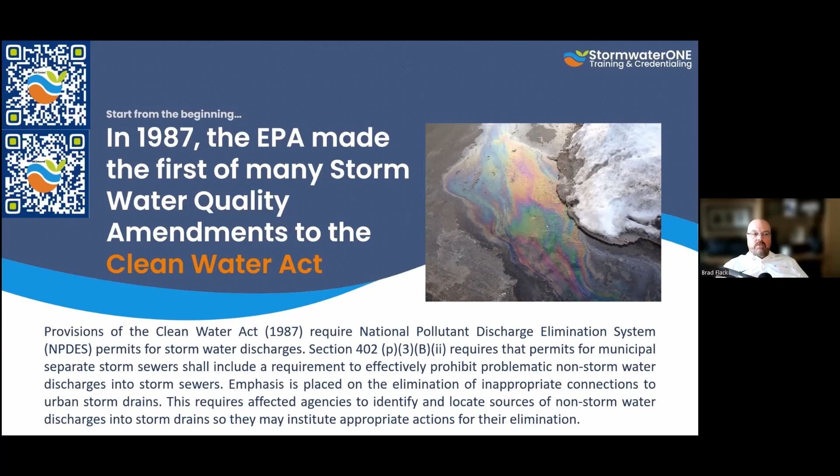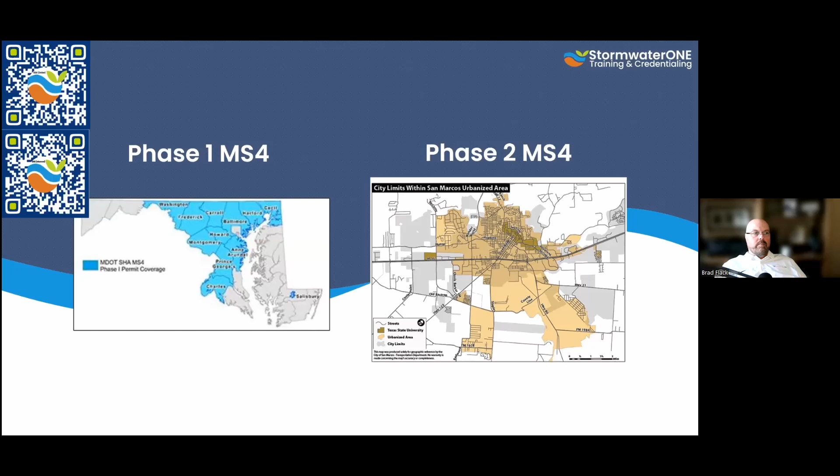The phase ones have been around longer, and kind of have an idea of what they're supposed to be doing. So the phase twos, we're still playing catch up here, even after 10 to 12 years later. We're still playing catch up on trying to get all these phase two MS4s up to speed on what they're supposed to be doing.

As a reminder, this is very elementary, but I want us to make sure we're all on the same page here, there are three different kinds of pipe systems underneath the ground, right? The first one is fresh water. That could be from a municipal water supply. It could be a drinking water supply, whatever. It could be a well on a site, or a well that distributes drinking water to a number of homes or businesses, right? So we have the drinking water system, and then when you wash your clothes, that dirty water that gets flushed out of there, toilets after they're being used, etc., those are emptying out, and those are going into a sanitary sewer line.

And that sanitary sewer line, if you'll remember with me, you go back to watch the movie Finding Nemo, and that scene in the dentist office. You've seen Finding Nemo, right? This is not a spoiler alert, but you go into the dentist office, and they're all trying to get out of the fish tank, and they're trying to go down the drain or get flushed down the toilet. And the idea that they keep saying is all drains lead to the ocean. Well, if you worked in any sort of municipal operations, yeah, drains do lead to the ocean, but not a direct path. They hit a big hurdle that they don't mention in the movie on the way to the ocean, and that's the wastewater treatment plant, right?

So we have this big obstacle that they're going to hit, where the fish would get ground up and the liquids and solids separated and all this kind of stuff. So there's a sanitary sewer in the ground. And then we have our storm drains that might be in the ground, our storm sewer system. And if you notice, the freshwater supply, that's effectively clean water, right? And then you have the sanitary sewer once it gets to the wastewater treatment plant, or sometimes you have an on-site sewerage facility, or maybe like a large septic system of some sort.

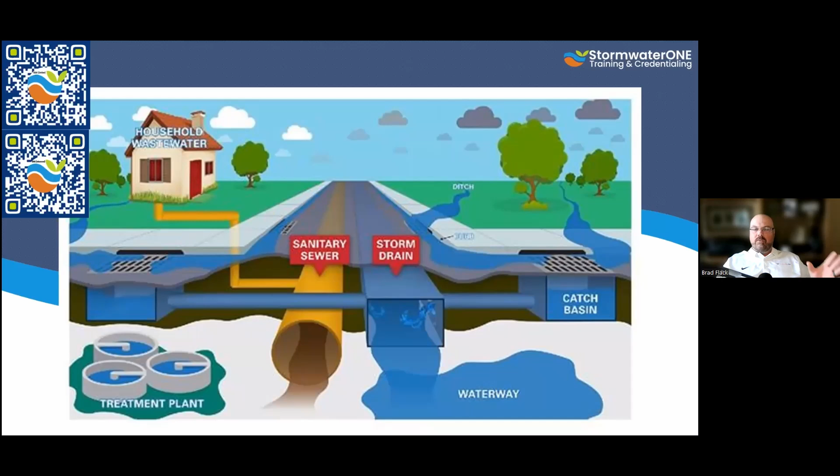But in the meantime, we have a lot of systems that are older, and so we haven't done a retrofit of everything at this point. And so we have a lot of older systems where surface pollutants are still allowed to discharge down. So instead of trying to put a filtration system on every single drain that's been there for 100 years, we're now trying to prevent those pollutants from going onto the ground or discharging from that site in the first place. And that's kind of what this idea of IDDE is about.

So let's define this real quick. What is the basic definition here of illicit discharges? The basic definition is this: they are simply a storm drain discharge that has some sort of measurable flow, like I can see there's something there. And it's typically important for us to remember to do this during dry weather, because when there's wet weather, when it's rain or you have a lot of snow melt, you're going to have water flowing through there, and it's going to be very difficult to detect any problems.

But if it's been a number of days or weeks or even months since the last rainfall event and there's still water coming out of the storm sewer system, we might have a problem. We might need to actually go and investigate what's going on there. These illicit discharges typically contain pollutants or pathogens that we don't want to enter into our surface water. They typically will originate from an impervious surface, so they're coming off of asphalt, concrete, pavers, etc. That's the place where they're coming out the most.

That doesn't mean that they can't also come off of unpaved territory. They could. Somebody spilled a bunch of oil onto the ground, and it rained. Oil floats on top of water, so that would discharge. But most of the time, these pollutants are coming off of impervious surfaces. And so some of the major places that we need to keep really close eyes on would be apartments, dense home development where a lot of people are living, car washes, even restaurants.

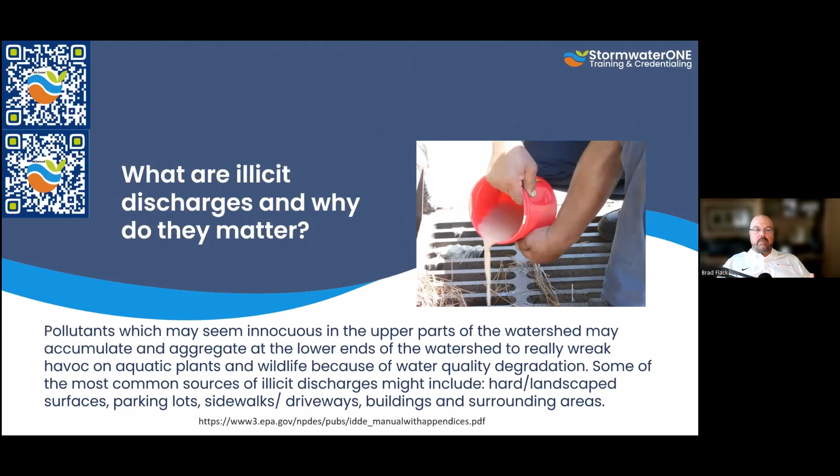So having a basic understanding of what these generating sites are should help us to understand our inspection and monitoring procedures and locations within our jurisdiction. So are all discharges the same? Well, the simple answer is no.

I mean, if I'm in a small town and I don't have really any manufacturing going on there, and I just have farms around the outside of town, and I just have some retail and general store type stuff or whatever, my types of discharges there are going to be vastly different than if I'm in a dense manufacturing industrial operating area. And so with an illicit discharge, we still want to prevent those pollutants from discharging out into the receiving water, but what we're chasing is going to be different based on where you are.

That's actually why we kind of have to fly at a high level. You can imagine everybody here, I mean, from Edgewater, Florida to Columbus, Nebraska, we've got huge swings in what all these different sites are and what their potential pollutant loads might look like coming out of there.

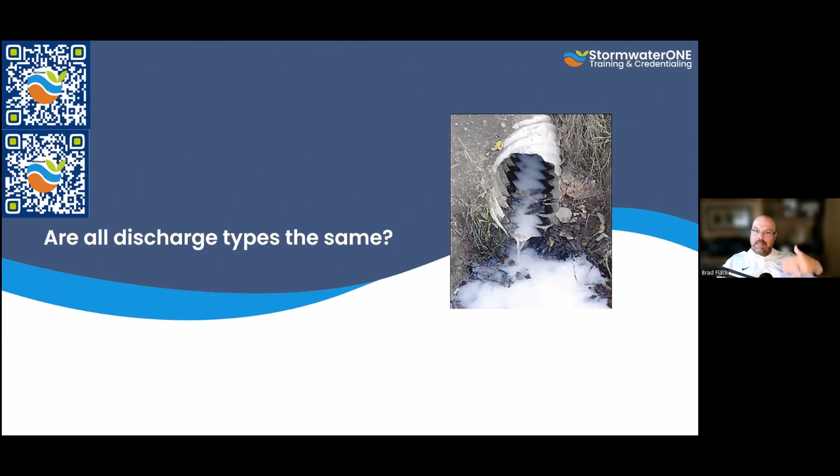Now, that being said, the MS4 permit that you're operating under does allow for a handful of non-stormwater discharges. And so non-stormwater means not from rain or snow melt. And these waters are allowed to discharge, but I'm going to put an asterisk next to that. We're going to talk about that for the next couple of minutes here.

So one of the non-stormwater discharges that would be allowed is firefighting activity, allowing us to prevent a building from burning down. We're going to spray the water on there, and that is an allowable non-stormwater discharge. The only caveat to that would be what is in that building, or what is that building made of? We need to think about that before it catches on fire.

I wouldn't want a dry cleaner chemical distribution center to catch on fire and us just spray water on it and call that good, because if any of those storage containers, any of those totes has some sort of compromise to allow those dry cleaner chemicals out of there, we want to have protocols in place so that we can prevent those from leaving with the firefighting water.

And as Mel mentioned, a lot of these firefighting activities, depending on what you're doing, have some sort of surfactant added, and that's to help coat and snuff out the fires. And so all of those would have to have kind of pre-planning in place to make sure that we understand that there is a potential for other pollutants besides just water from the fire hose coming out of there.

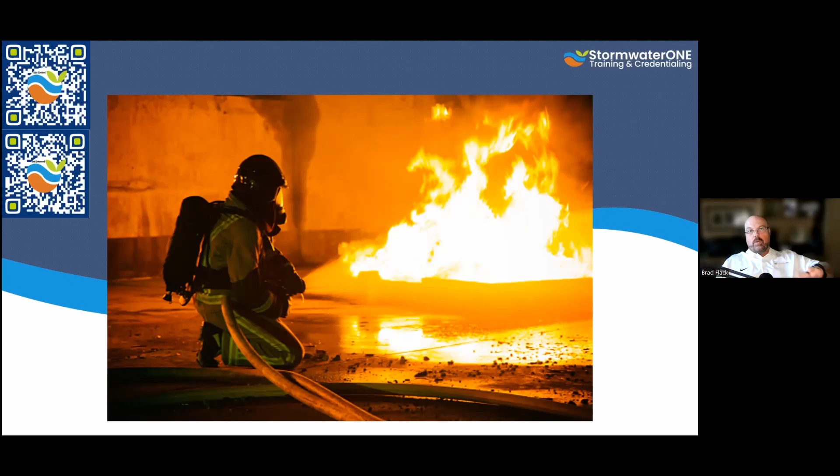So again, it is an allowable non-stormwater discharge, but if we're all here because we want to learn and we want to do better, we have to remember that there are going to be some places where we have to put in additional control measures to offset those potential discharges from the site.

Another non-stormwater discharge would be fire hydrant flushing. That's one of those things where you just drive down the road and splash through the water. So where's this water coming from? It hasn't rained in 2 weeks. And you reckon, oh, there's a fire hydrant. We're flushing a fire hydrant. That's okay. The caveat to this would be if the fire hydrant is spraying water onto a pollutant source, onto a used oil pan or something, and that could be discharging pollutants from the site.

Or if the fire hydrant is flushing onto bare dirt, bare soil, and it's causing erosion, then we're discharging sediments out of there. So we've got to be careful about where these things are placed. Obviously be mindful of all the different environments around those so that we can prevent the discharge of any pollutants, even when we're doing something as mundane as flushing fire hydrants.

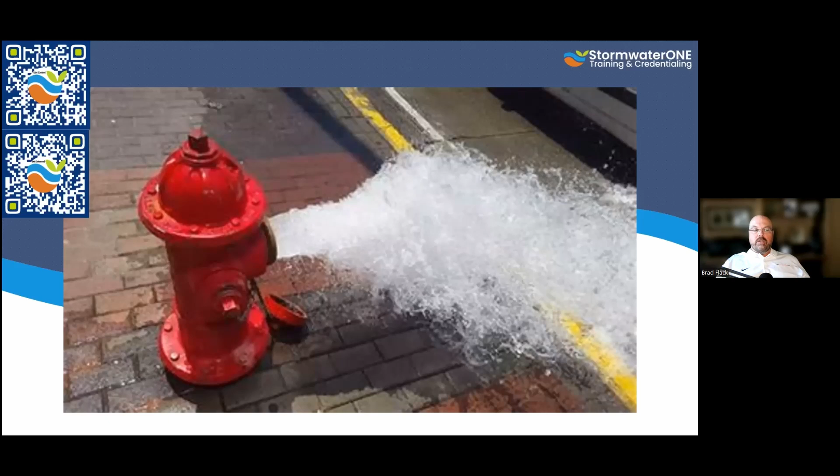One of the other ones is washing of vehicles and equipment. You are allowed to pressure wash. The idea behind this is it's not in complete disrepair. It's not like the hood's missing and you're washing oil off the engine onto the ground. We're washing the outside. And the idea is the outside of the vehicle is going to have dirt that would otherwise end up on the roadway anyway, right? We're just washing it off so that the vehicle's clean and leaving the dirt on site.

And so we actually have an ability to wash off equipment, but we wouldn't want to discharge any sediment-laden water off the site. And the caveat for the whole thing is that we can't have any soaps, solvents, or detergents in our wash water. So as soon as we mix in that soap with that sprayer and we're washing it, now it's a non-allowable discharge.

Mel also made a note here. She said, in California, the temporary crash cushions are filled with potable water, and sometimes they are near bridges. When they empty them, they need to make sure it doesn't flow into the water body. Yeah. So again, those plastic crash barriers that are on roadways and highways, they're filled with potable water, sometimes non-potable water, depending on where you are. But we need to make sure that those are not flowing into the water body.

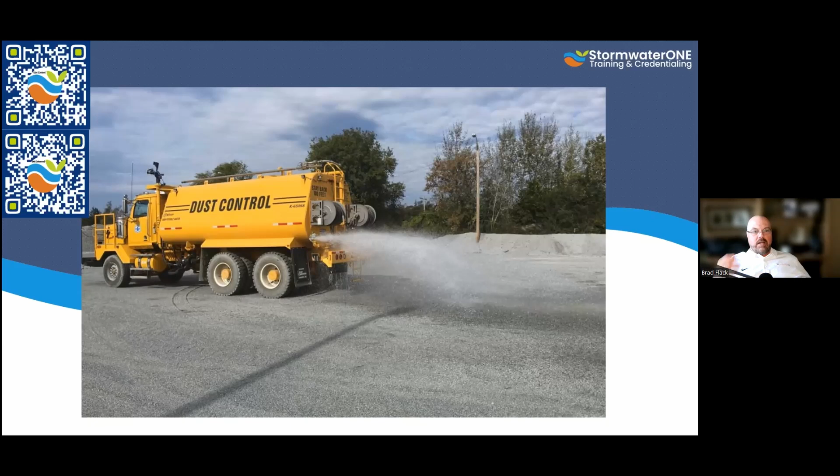Pressure washing of a building, that is an allowable non-stormwater discharge, provided there's no soaps, solvents, or detergents. And again, that rain's already going to hit the stuff that may be on there, some algae or dust collected there. Some of it's going to discharge. And so we're just saying, hey, we're expediting that process, and we're just washing that stuff off the surface. And if we don't have any soap, solvents, detergents, it can go through our system.

But if we have soap, solvents, detergents, some sort of acid wash or something, then we have to collect that, take a vacuum truck or a pump truck and suck that material up and then haul it to the wastewater treatment plant to get processed properly. Furthermore, if we have paints or caulks that have PCBs, those would also be a concern, because if you end up pressure washing and some of that stuff comes off, that would end up in our surface water, and that's not allowed as well.

So understanding the materials that the building is made of and what is on the surface is key to understanding your compliance there. And if you need to put some sort of acid, soap, detergent, whatever, to make the building clean, then you would need to plug up all the drains, let the water collect, and then remove that water before you allow the surface runoff to exit from the site.

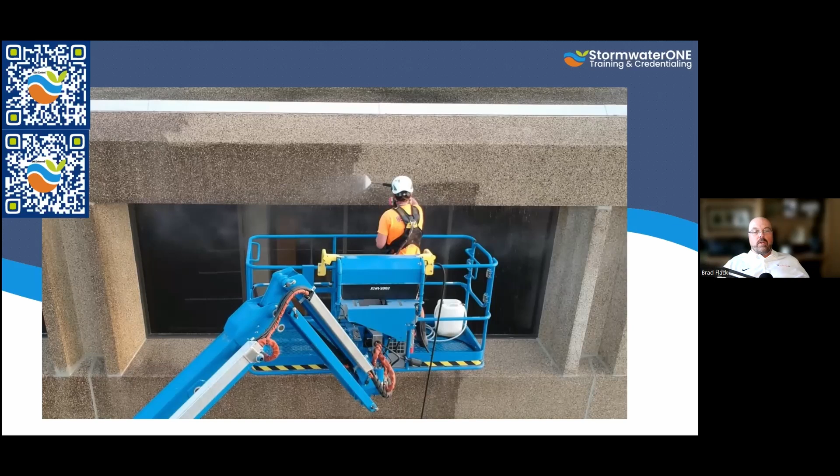Another one in the same vein is going to be pressure washing of pavement areas, parking lots, etc., provided there's no spills or leaks of toxic or hazardous substances on the ground. If you're going to pressure wash the parking lot at the football stadium downtown, you're allowed to do that with no soaps, solvents, detergents or acids. But if you know that somebody's car was leaking oil all over the place, you can't use the pressure washer to wash the oil off the parking lot down the storm drain.

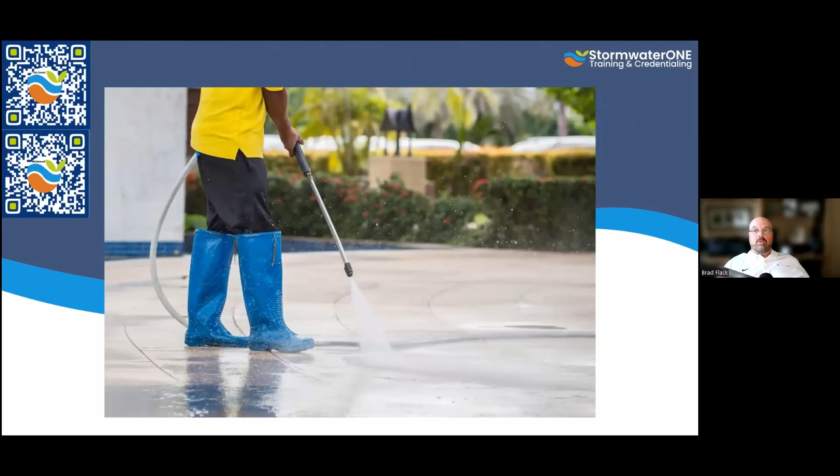That's not allowed. You have to deal with that area first, clean up that spot, and then you can do your pressure washing of your paved area. So we want to make sure that we're not just removing it from our site and sending it downstream for someone else to deal with. And someone else is likely one of you, because I'm assuming most of you are working for some sort of MS4.

And so they're just saying, well, we'll let them handle that, right? Another allowable non-stormwater discharge is going to be condensation from your air compressors, from your air conditioning systems, etc. It just takes atmospheric water and discharges it down into the ground. If you can let that go onto a grassed or dirt landscape area of some sort, that's even better, because then that water can soak in and be utilized by the plants and vegetation. If you can't, you can allow it to flow across the parking lot or across the sidewalk or whatever.

I have a client that does fiberglass conduit and pipes and fiberglass street lamps and stuff like that. And their air compressor is huge, because that's how they hold the molds open, they put compressed air inside of them. And the discharge line for the condensate that they put on the outlet of the air compressor is made of galvanized pipe. And so it's actually causing rust. And now there's big rust stains coming out, and that's dropping right down to the storm sewer.

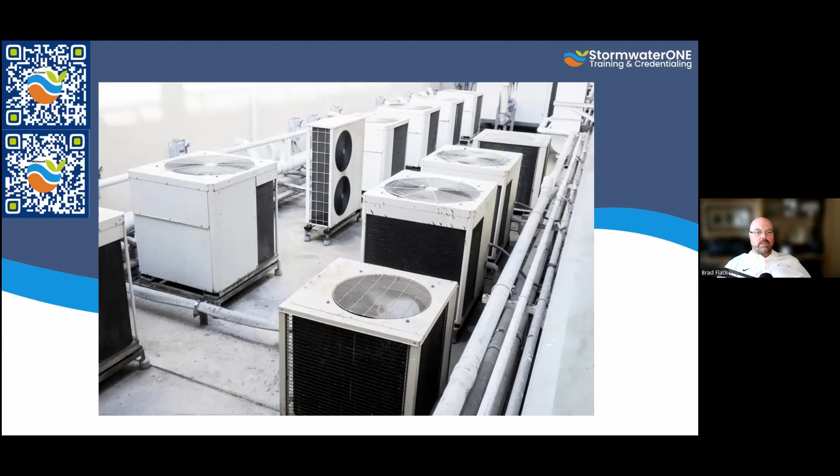So I'm working with them right now to, hey, let's change this out. You're allowed to discharge the water. You can't discharge rusty water out of there. So we're changing that over to like a PVC discharge line. It's not under pressure. It's just the condensate that's discharging. So keep that in mind as you're thinking about your non-stormwater discharges.

If you're on a site that is pretty blessed and has an uncontaminated, non-turbid discharge of groundwater or spring water, that's an allowable. You can leave that spring flowing there. That's okay, as long as it's not causing additional erosion and it's not in contact with any of the pollutants on the site. You're allowed to let that water flow across the site. So keep that in mind.

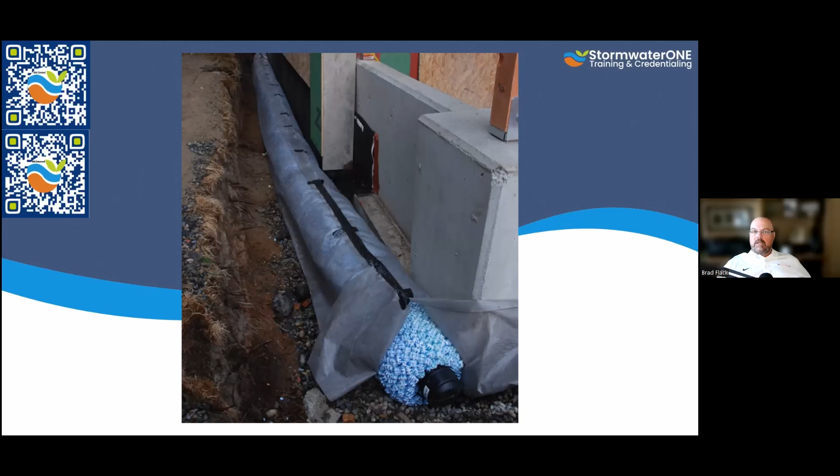If you have a foundation footing or a footing drain, you're allowed to let that water that seeps through the ground and enters into those drains then discharge out onto a lower area of the site or out into a storm sewer. That's okay as long as there's no known pollutants entering into that system. So this is another one where, I don't have X-ray vision, so I can't look into these things. And as long as there's dirt and grass and landscaped area around here, then conceivably the water that's flowing through the ground and entering into this footing drain is okay. And so that's the idea behind that.

The next one is going to be water that's used to irrigate grass or landscaped areas. Those are allowed provided they don't cause erosion or otherwise spray water over top of a pollutant area. So we want to make sure that we're mindful of the various zones around our site to prevent that excess non-rainwater from coming in contact with those areas where it would cause a problem.

Anita says California Phase 1 permits require larger water purveyors to have coverage in the state's potable drinking water permit, which has required BMPs for fire hydrant flushing and other potable water discharge. Also, California just released a draft Phase 2 permit, and I'm not sure if this requirement made it into that permit too. Okay, so you've got to make sure that you have coverage there for BMPs for fire hydrant flushing.

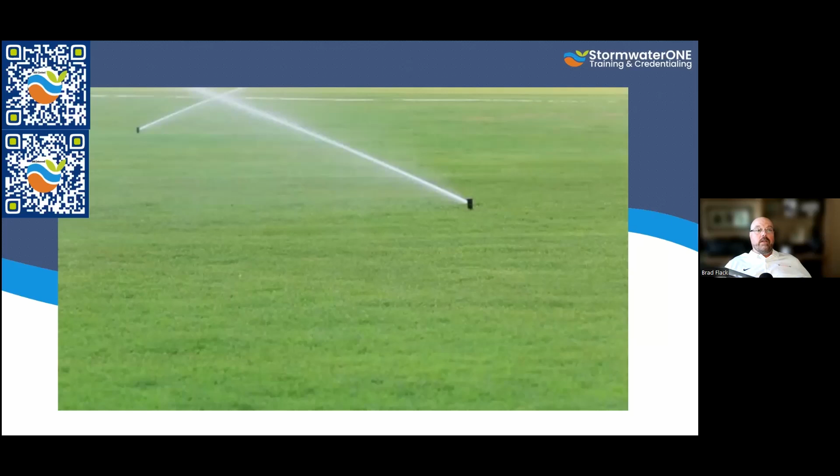I wouldn't drink water out of a fire hydrant, but it is coming from the same sources, as I understand it, that our potable drinking water supply is coming from. And so part of the flushing there is to make sure that we're not allowing that water to become non-potable by it sitting there and causing undue accumulation of sediments and other stuff inside those things.

The other one that is allowed to flow across the site if it's not from stormwater, like not directly from rainwater, is if the water is flowing through an established riparian zone. Riparian is the root from a Latin word that just means the shore. So if you've got water that's flowing off of a site and it goes through a riparian zone, these brushy, tree-lined areas along the sides of a stream, lake, river, whatever, you're allowed to let the water flow through those.

They also do a great job of bioremediation. And so they'll help to filter out any potential pollutants that might be flowing through there. Now, they're going to filter out the Coke cans and the Starbucks cups, but they're not going to actually decompose those. They're not going to metabolize those. So those still need to be picked up and hopefully prevented from going there in the first place.

Now, Anthony says, MS4 permit says you can't wash your car with soap in your driveway.

So depending on your MS4 permit, there is some proviso in there that says if an individual homeowner is going to wash their singular vehicle in their driveway, they may be allowed to use soap there. Okay, you have to look at your permit and see the way it's worded.

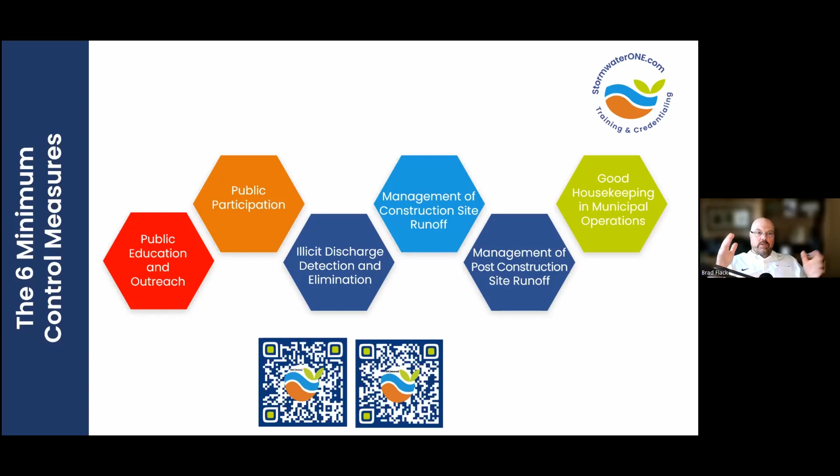And so you have construction going on within your city limits or your county or whatever it is. And so your goal is to make sure that those people are actually following through with their construction general permit requirements for their particular site. So you're kind of the first line of defense to help them meet their state or EPA construction permit guidelines.

If there is like a detention pond, I want to make sure that it's flowing into and out of it properly so it doesn't flood that site or neighboring sites, et cetera. So I know a lot of you are doing kind of the stormwater quality permanent BMP maintenance and inspections now, which is the requirement there.

Number 6 is going to be the good housekeeping for you, the municipal operator. Make sure that you are keeping up with your wastewater treatment plant, to make sure that your salt pile for the winter time is not just flowing right out of the site. Make sure that you're updating and maintaining your vehicles and not changing oil right on the ground someplace.

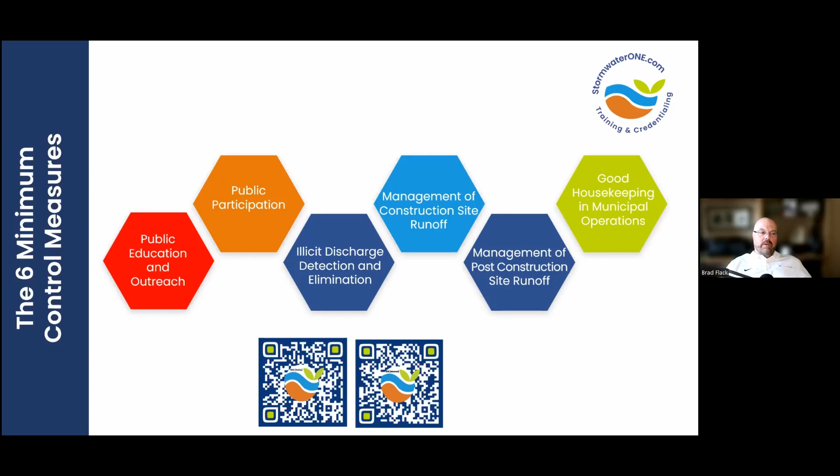So it's just kind of self inspection and making sure your own operations are within the guidelines of the permit as well. You're not asking others to do what you're not doing. Okay, so that's number 6.

All right, one of the requirements of the MS4 permit is to identify on a map all of the high-risk dischargers. So, hey, these are the potential bad boys within our jurisdictional boundary. Also to identify your outfalls. This is where not just this neighborhood empties out here, but this neighborhood might have multiple culverts that empty out into this receiving stream.

And so you want to make sure that you also note any sensitive areas or other areas that might have additional monitoring. Like we have a spring that's over here. We want to really protect that area so we don't cause pollutants to sully up our spring or something like that. So some of these sites, like I talked about, they're called known dischargers, and we're calling them generating sites.

But having an accurate map is going to be key to understanding where my receiving waters are in relation to our jurisdictional boundary. Where are the key places that really need to have additional, above and beyond the minimum inspection and monitoring, and that you can kind of prioritize your field investigations based on those areas.

Or hey, the other side of town, we weren't worried about it, but boom, we found somebody spilled something or dumped something. So we need to keep an eye on that. So it kind of helps you prioritize your field investigations. Now you can use digital, you can use paper. It doesn't matter, kind of whatever your budget and your staff can handle.

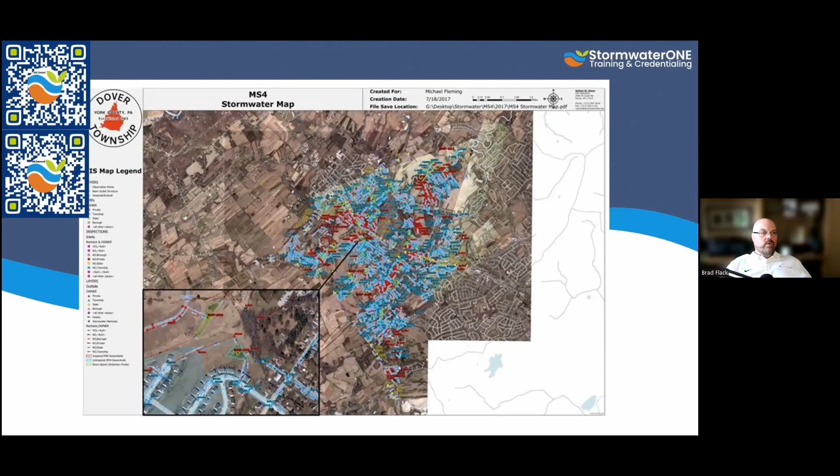All right, so those are items that help you understand how to investigate and do your inspections and monitoring. So speaking of generating sites, there are some major ones, and we'll cover those real quick. In the process of creating your map, I forgot, I'm talking about this for a second. If you say, hey, there's a pipe coming out of the stream bank and it's emptying water from someplace, I don't even know where this thing's coming from, right? This was built 100 years ago. The pipe still seems to be in pretty good shape, but I don't know where this water is originating.

So you can do something that's called the dye test, and that is where you put down a non-toxic, biodegradable dye, and you drop it into this storm sewer junction box or manhole here, and then we'll monitor and see which one of these pipes it comes out of. Okay, so I don't know exactly how it's getting there, but that area is coming to this particular pipe. So you can kind of reverse engineer your underground system, especially for the older ones.

The newer ones, I'd say in the last 50 years or so, really have a pretty good handle on where most everything is. But if it's older than that, you really start getting into the, I don't know, man. That was put in a long time ago, right? So it may be difficult to track that stuff.

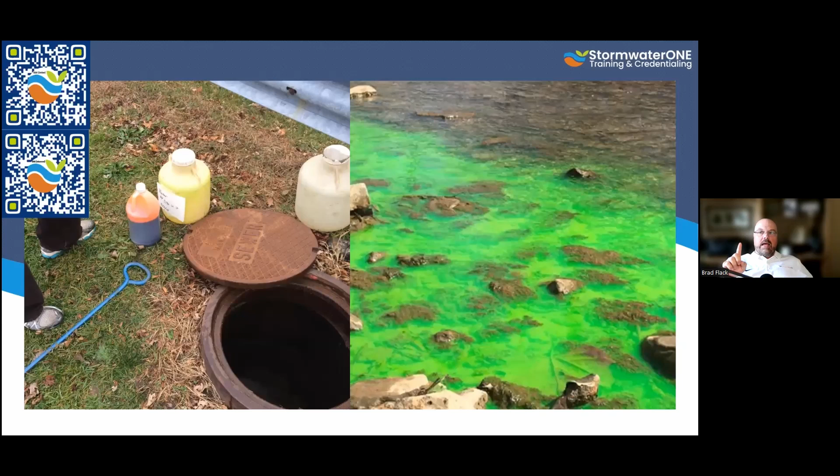The other thing that you need to have is a standard operating procedure manual. So that way, hey, I found this, here's what we do. And everybody has the same thing. I found this, I got to do this immediately, and then I got to report this to this title, this position within the group. And if it's this level, then I escalate it to that person or whatever. So have a standard operating procedure. If you haven't done that, you really need to work on doing that.

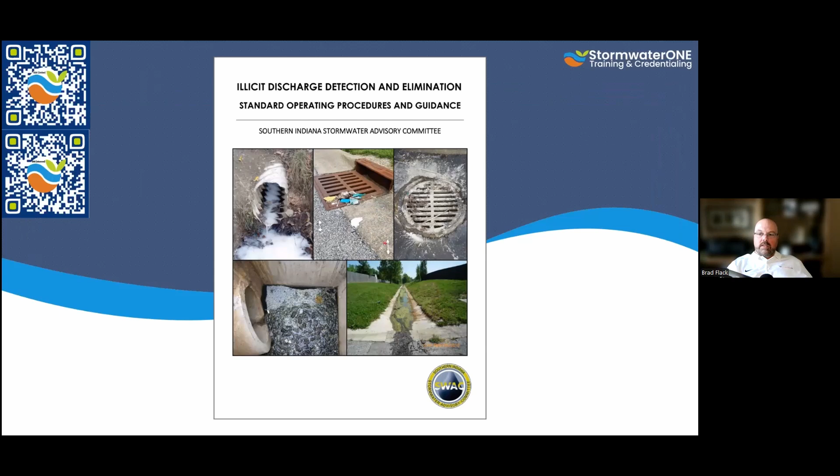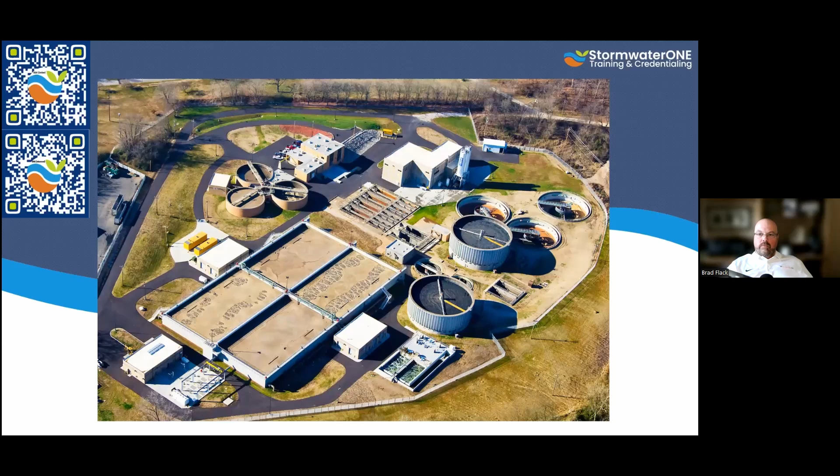Now, the generating sites. Number one for the MS4s is going to be your wastewater treatment plant. Like I said, very important for modern urbanization, very important to prevent all this stuff from discharging out of here. So you want to make sure you are checking this thing, and you have people on site almost every day. Make sure that they're doing the walk around, drive around inspections to check for any potential issues. If they're looking at the same thing every day, they're going to notice a difference. They're going to notice a change.

Oh, that leak wasn't here yesterday. What's going on here, right? Or that crack in the wall that's new. I don't remember seeing that before, right? I am always a big fan of taking pictures. That way I can go back. Well, what was that like last week? No, that crack was there, but it's bigger now. I can see that now. So taking pictures is huge.

You don't have to keep them forever, but having a track record to keep an eye on the deterioration, I should say, not even progress, because all things in our universe eventually deteriorate and break down, even plants and humans, right? We all end up passing away one day. So we're all destined to deteriorate. And so anything that we build is new for that moment, but then it begins the process of slow deterioration. So keeping an eye on tracking that progress is important.

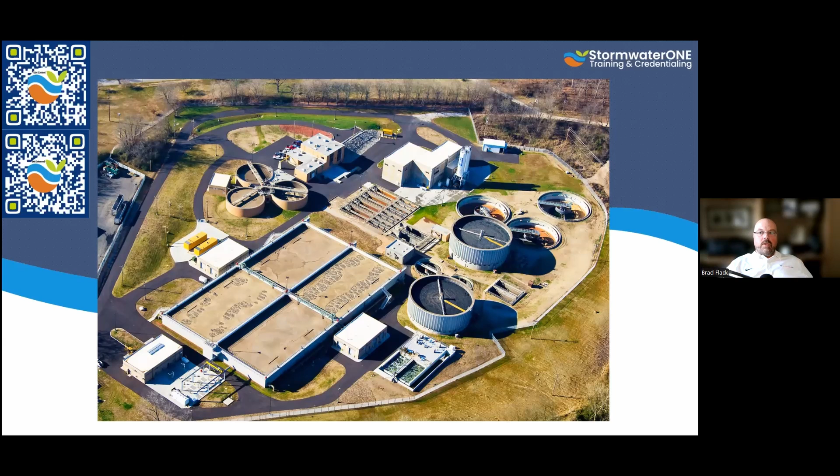If you have a septic system or an on-site sewer facility, it may not be run and operated by the MS4. I get that, but you want to make sure that they're being maintained on their own site, because if those things start overflowing, that's a problem, because then that surface water pollutant could then flow down across the surface of the ground into the receiving stream that is your responsibility.

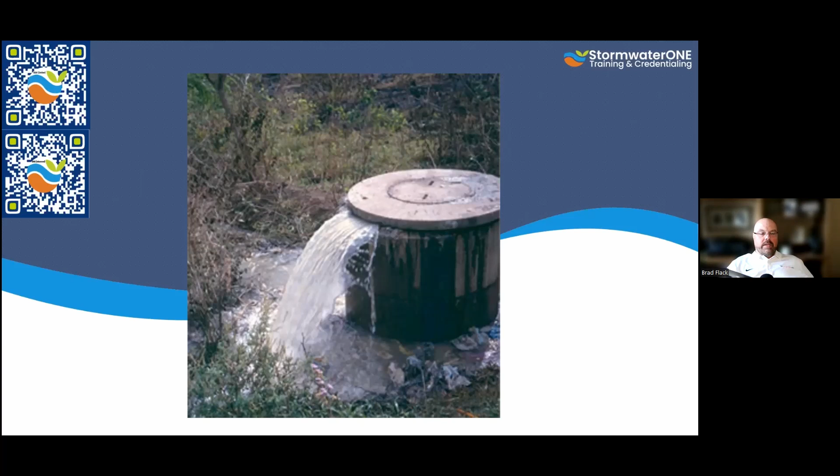So you still have to have a plan in place for those septic systems that are on site and maintained and operated by those individuals. You want to make sure that those are being maintained and inspected on a regular basis to prevent those discharges from ending up in the surface waters.

When you're looking around, you're looking for signs of any changes in the clarity. Is there floating solids, settled solids, suspended solids? Is there a foam? Is there some sort of sheen? Is there some sort of milkiness, opaqueness in the water that wasn't there before? You're looking for changes in the water. So obviously something's coming out of that pipe there. And so, where is that coming from?

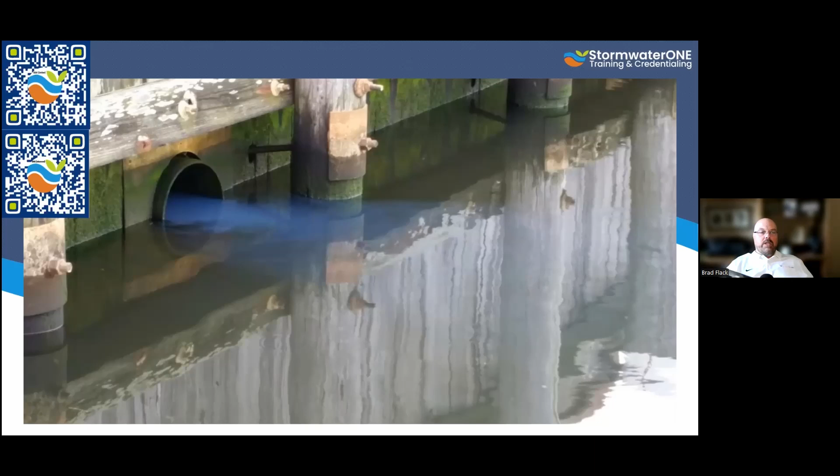Now, if you already have it mapped, you can say, hey, it's going to be one of these 3 inlets over here, or one of these 8 inlets over here, or whatever. You can track it down, or it may be longer than that. It may be coming from half a mile away, but you're able to track it down and kind of focus your investigation, knowing where that's coming from. And that's where the map comes into play.

If you have used oil or grease traps, fats, oils, and grease separators, that kind of stuff, make sure that they're being inspected and maintained on a regular basis. And furthermore, if it's at all possible, you should not allow them to put them right next to the storm drain. That is just a discharge waiting to happen, right? So this is a major issue right here.

Not because that amount of oil is gonna cause the world to end. That's not it. What we're saying is, if we're responsible for what goes down that storm drain, then I got to prevent that oil that's on the ground there from ending up in that storm drain. And that means they've got to do a better job of maintaining, cleaning, and operating their used oil facility in this particular location.

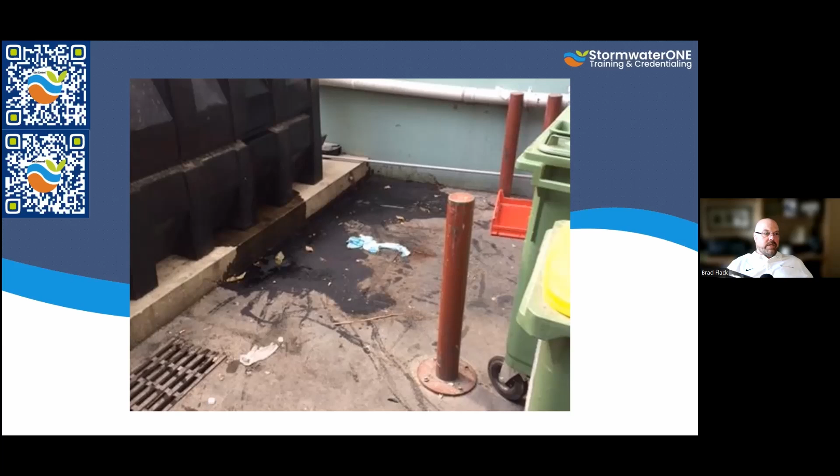Another thing that we have to keep in mind is any motor oil, antifreeze, gas, diesel, any spills at these gas stations, fueling stations, vehicle maintenance facilities, car shops, auto shops, salvage yards, etc. They have a high potential to discharge these pollutants into our waterway. And as you know, if oil, diesel, gas floats on the surface of the water, I can't just wash this stuff away, because that would discharge it out of the site.

We've got to have plans in place, and each one of these facilities needs to have a plan in place with the proper spill kit and action response plan for anything that might happen on their site. And so that may be something you can provide to them, or maybe something that you request them to give you a copy of, so that way they have it. The simpler it is to understand, the more likely they're going to actually follow through with it.

But if for some reason they're just unwilling or unable to do that, you might need to provide that. A very similar spill response plan for a gas station could be for all the gas stations in your jurisdiction. But you want to make sure that there's something there that people can read and understand and can follow through, because this is a real high potential for discharge from these particular sites.

Your MS4 permit also requires that you identify and control the pollutants within your jurisdictional boundaries. That means I have to have my eyes on where all the discharges are into these surface waters. If it's covered up with overgrown vegetation, if it's hard to reach, whatever, I might need to clear a path so I can get down there and do my inspections and monitoring on a frequent basis. I want to make sure it's accessible, right?

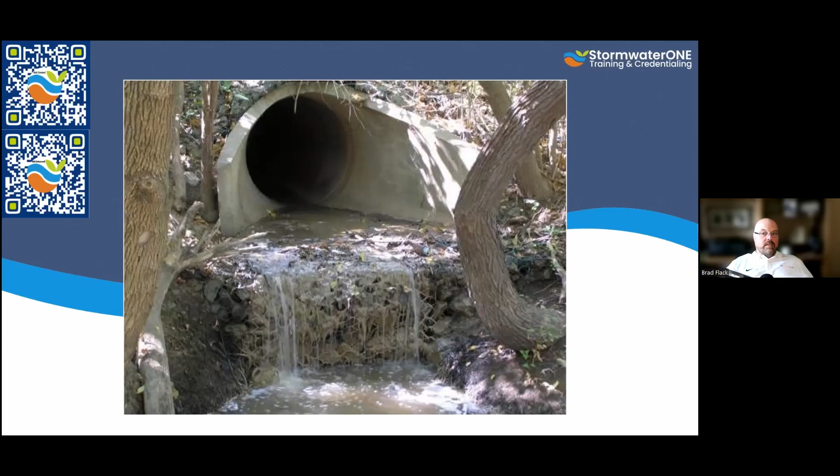If you're operating a municipal landfill, which I know a lot of them are privately held and run, but if you have a municipal landfill, you have additional guidelines that you must follow along the way. But if you have a privately run one, then you're simply following up to make sure that they're meeting their requirements. If you've ever been to one of those places, they're not my favorite place on the planet.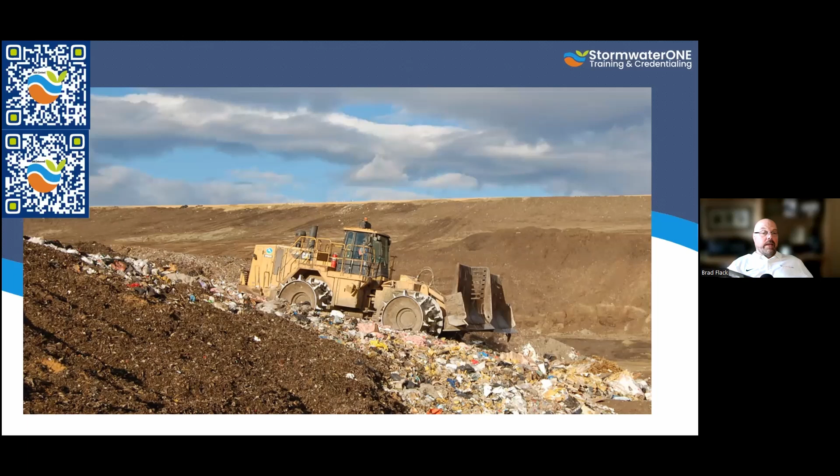And that disgusting juice that comes out of those piles is not something I want in the waterway when I go to put my boat into the water to go fishing, right? So we want to make sure that these are being maintained, they're managing their potential pollutant load to the maximum that they can. And then we just want to look over their shoulder, make sure that they're doing that. They're essential. We've got to have them, but man, we want to make sure that they're also not causing havoc on everything else around them, right?

So we also have any place that has hazardous waste treatment, storage, disposal, recovery, transportation, etc. We want to make sure that they are following all the protocols and procedures for what those potential pollutants are, right? I know that there are certain chemicals that you can just put in a drum and they're basically inert at that point, unless they got out of that drum. There are others that if you dropped it too hard, it would cause a chain reaction and it would be very bad. So they need to understand the potential problems associated with whatever chemicals they have. And if they don't even know what chemicals they have, that's a problem.

So that's where it kicks you into the multi-sector general permit, or the industrial stormwater permit, as it's also called. That's where they have to have their plan in place for how they're going to manage their potential pollutants from their site. And so you're just following up to make sure that they're doing that. So those are key areas. That's a key generating site.

If you have a facility that has some sort of toxic release inventory where they're releasing particulates into the air, if you've got a prevailing wind that's from the southeast to the northwest, let's say, then that plume that might come out of there has been permitted, but those particulates, what goes up must come down. So those particulates may be landing to the northwest of that facility. So we need to be checking and monitoring the surface pollutant load on the ground in that area. Those might be flying under your radar, but you need to have those areas that you can check to make sure that it's not just accumulating to a toxic level on the ground.

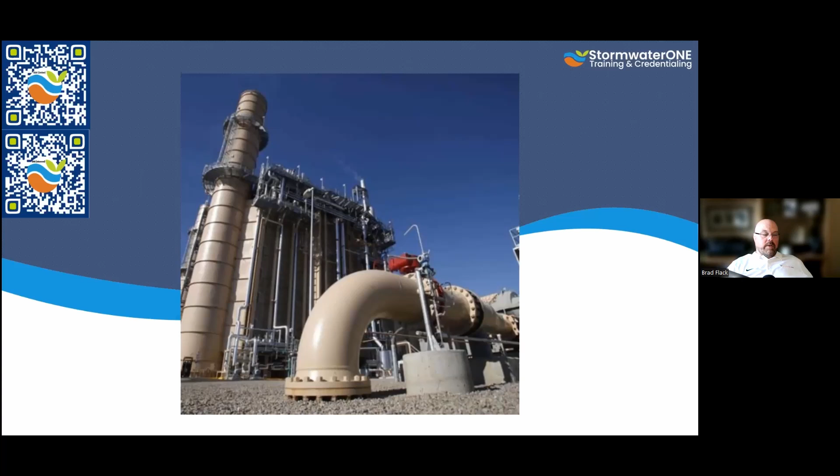If you've got any of those industrial, like I said, scrap yards, salvage yards, etc., any surface runoff from those places, I don't care how long you leave the drain plug out of an old car and drain the oil. I was working at the Port of Houston. They had a huge recycling facility, and they would drop whole cars into this blender, blend them up, and they would come out with fist-sized pieces of metal. So I don't care how long you drained the radiator or the motor at that point, there's still residue in there. And now that it's been exposed, anytime it rains, those pollutants are going to come off of that stack of recycled metal until it gets put on the barge and hauled off to get melted down again.

So we've got to make sure at those locations that we're following through with what's the discharge coming out of those sites. Do they have BMPs that are going to prevent the discharge of those pollutants from those particular sites? Kayla says, could you elaborate on fertilizer and pesticide use in residential lots or commercial lots? We're going to get to that in just a moment.

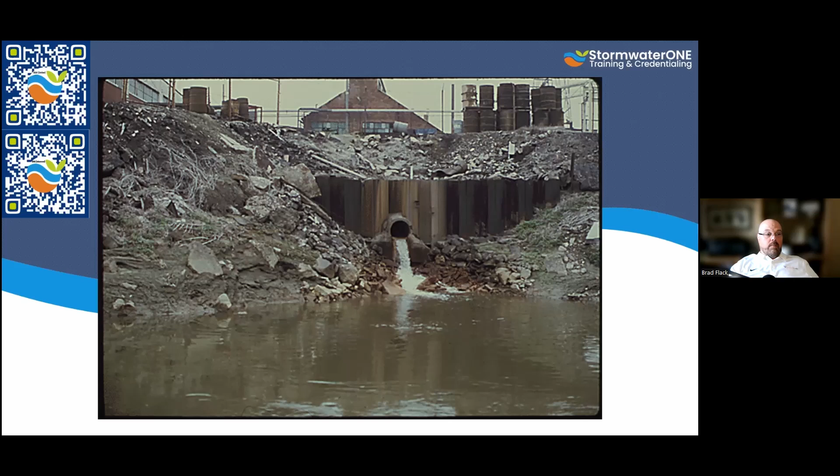Absolutely. If you have a place with deliberate illegal dumping, that's a problem. I know that there are certain cities that have put up game cameras to catch license plates of those people that are dumping, because it costs city resources, time and money, to go out there and have people pick that up. We should be preventing that from happening. And part of that may be they don't understand that not only does it take time and money, tax dollars, but it also is potentially discharging pollutants into our surface runoff.

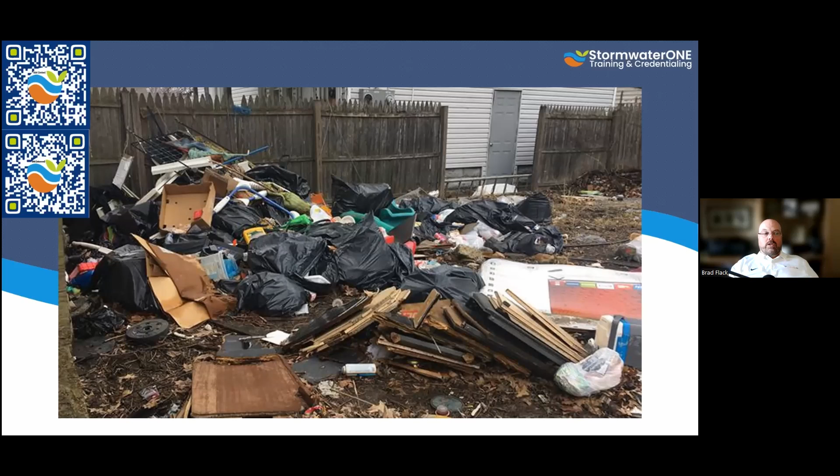And then contractors, man, I can't tell you, there's a number of sites around town where contractors go to that dead end road and they just dump all their stuff because they don't want to go pay the fee to dump it as a commercial entity. And so those are known sources as well. So we want to make sure that they're being dealt with and managed.

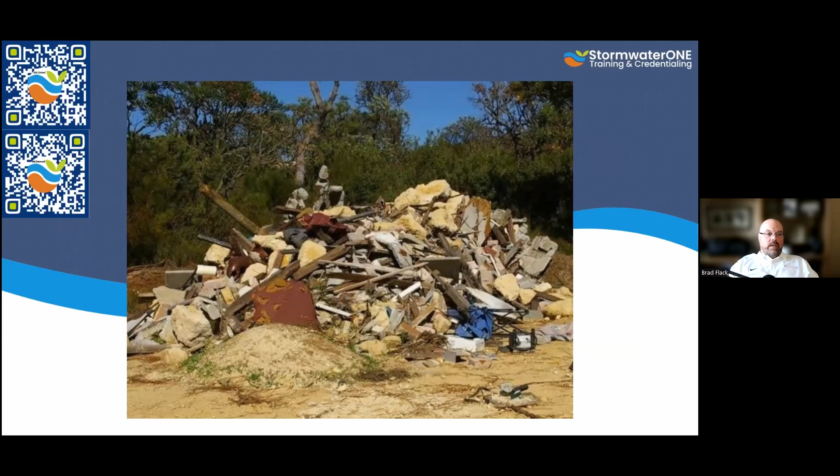Now, going into industrial dumping, if there's something that's on the site that I don't want to eat or drink, I certainly don't want it in the waterway. So we need to make sure we're identifying those sources and then we're managing them.

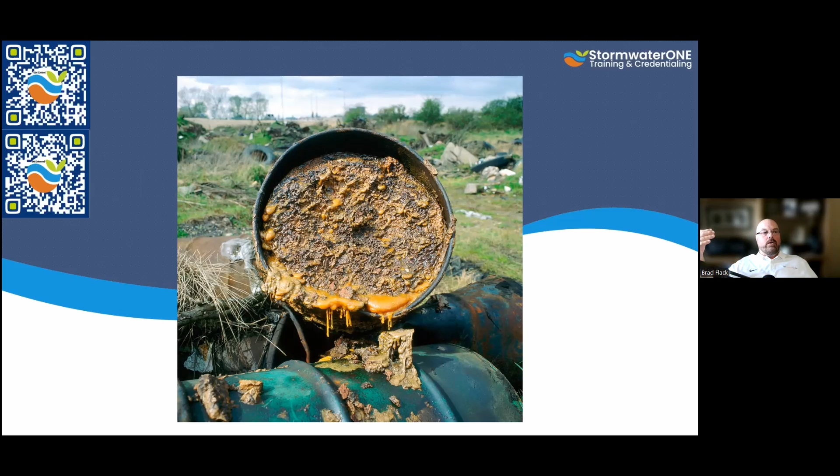And sometimes you manage one area and they're like ant mounds, right? I killed this ant mound, but I didn't actually kill it. They just moved 10 feet over in my yard. I'm like, oh, there's another ant mound, but it's the same colony. They just moved over there, right? So the same thing here. These industrial dumps like this, a lot of times they'll just find the next thing. So we have to be vigilant in investigating and inspecting our jurisdictional boundary to make sure that we're keeping track of where those places are.

Going back to your question, Kayla, about fertilizer, pesticide, et cetera, irrigation is an allowable non-stormwater discharge. We talked about that earlier, but it can become a source of illicit discharge if you don't manage the rate at which you're putting down pesticides, herbicides, fertilizers, et cetera.

And so, especially if I'm in an area where my water is discharging into a waterway that's already been identified as having a problem with nutrients, nitrogen, phosphorus, et cetera, I want to make sure that we're actually following through and helping people understand, hey, we've already got an excess amount of nitrogen or phosphorus in this waterway. I'm not saying don't put fertilizer down, but you need to do it under this rate, this many times a year, et cetera. And this is not the conversation today, but chemically derived fertilizer versus organic fertilizer, chicken poop and horse manure and all the other stuff. So you really have to go through there.

Furthermore, grass clippings, leaves that fall from the trees. We're about to start seeing leaves falling from the trees in the next couple of months. Those ending up in the waterway can really change your chemical oxygen demand and all that kind of stuff. So we really have to make sure that we're focusing on the public awareness. That's why item number one is number one, because the public a lot of times is not aware of the impact that it can have to your watershed.

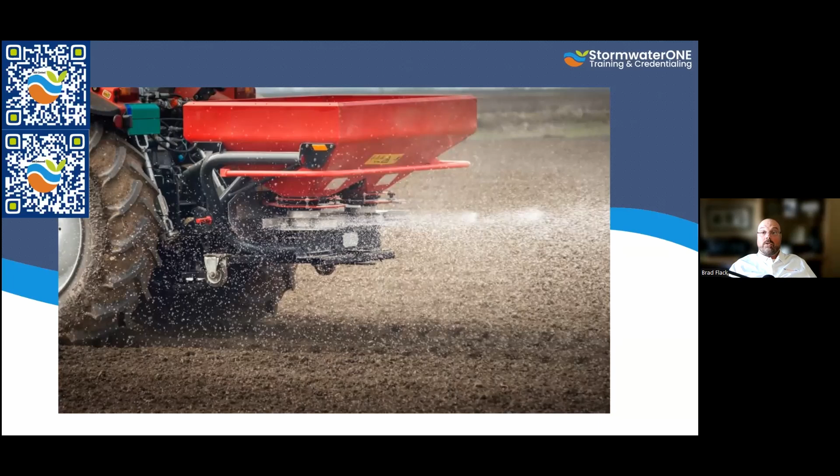One of my favorite movies is Batman: The Dark Knight, and the butler, towards the end, he's telling a story, and he's like, some people just want to watch the world burn. And I think there are still those people here on the planet, which is terrible, but the majority of people, given the information, will want to participate and be a part of the solution. So they'll pitch in there.

Stormwater ordinances can be created by you, the MS4, to help address some of these things. And so you want to have outfall screening. Make sure that you put notices. Hey, there's a discharge into the waterway from Bob Jones' neighborhood here or whatever. Please alert us if you see any changes in the water coming into this area. And get the public involved. Get them calling in for you.

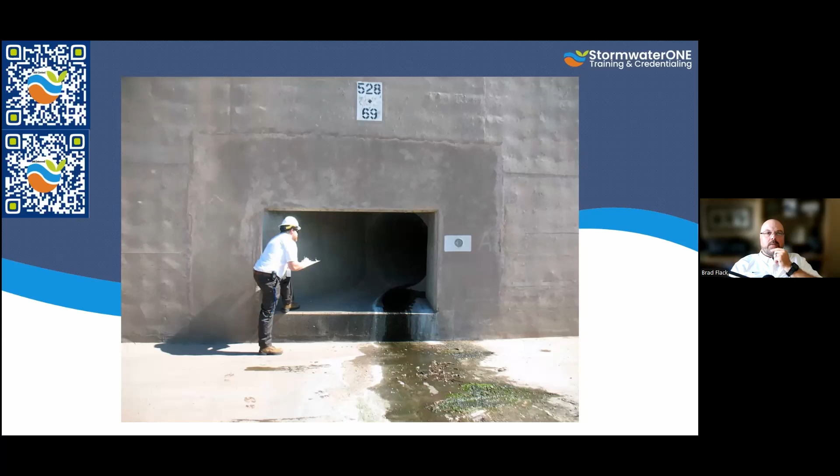You've got to do a visual inspection of every outfall, every single one. Obviously, don't do this when it's raging water pouring out of here. And like I mentioned earlier, it's probably better to do it when it's dry, because there's no water flowing out from a rainfall or snow melt, but we've still got some water trickling. Where's this water coming from? And does it have any pollutants in it? Oh, this is coming from a car wash or whatever. It helps you to understand when you do it in dry weather.

You need to do the qualitative analysis for each of these as well. The simple one is just color, odor, turbidity, floatables, sediments, etc. Is there sheen on there? That kind of stuff. You can just grab a plastic cup or a glass jar and just take a scoop and kind of analyze that, right?

There are certain places where you will also have to do, on top of that, quantitative analysis, and that's going to require some more sophisticated field equipment, maybe even laboratory scrutiny. And so it's going to help you understand the level of pH, the temperature, the conductivity, the ammonia, chlorine. Are there surfactants coming from someplace?

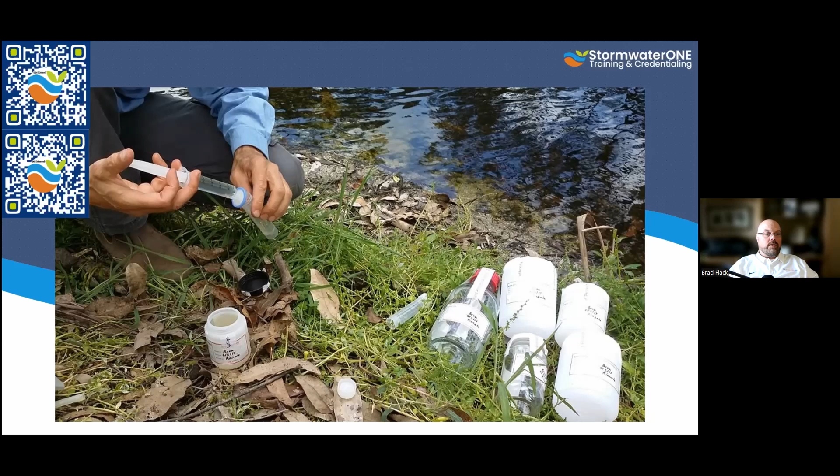Potassium, detergents, dissolved oxygen, fluoride, fluorescents, phenols, fecal coliform, all these things. You can't really see that just by looking at it, right? So you may have to go into a quantitative analysis to get those checked out. But some of those are what we call known triggers. And so it's like, boom, it popped up. We got phenols in here. Uh-oh, now we got a problem. Let's chase it back to the source from this point in the stream where I took this, and let's try to figure out where this is coming from, right?

Part of putting your map together is also requiring you to get a measurement of each of the discharge pipes, what they're made of, their material, what size they are, how long they are, location, even it would be good to have elevation. And so you need to have that on your map, but you're required to do the visual inspection every year to make sure there's no changes in that, right? If one of these pipes had started pointing a different direction, we've got some erosion, maybe some settling in some soil someplace. Let's go manage that. This is a problem. It's an issue we need to address.

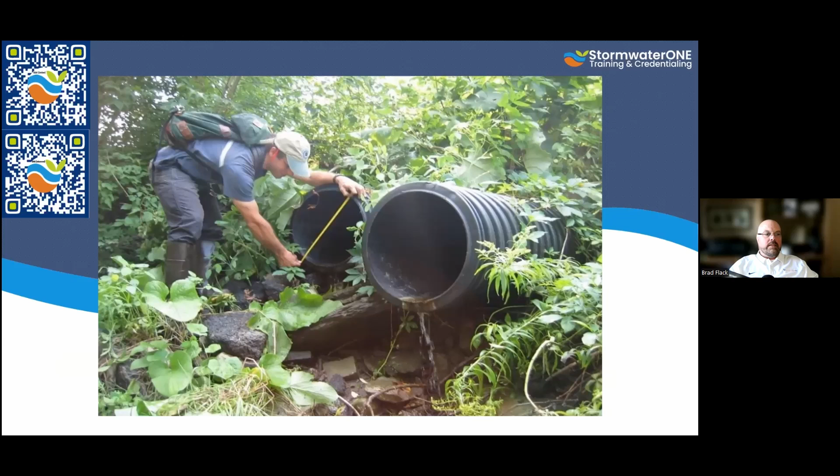Looking for your discharges, you're looking for stuff like, is there a new staining, a new color? Is there a new sediment deposit? You're never gonna stop erosion. There was zero humans involved in the creation of the Grand Canyon. So even if I have 100% grass, we're still going to have some erosion. So that means some sediment's going to come out of here. But if I notice there's a change in the color of the sediment here, why is it different than the other sediment that may be present here? Or there's a different color water or staining or whatever. I need to now chase this back and figure out where this is coming from.

So that's why it's important for you to keep up with your inspections and your monitoring to check those out here. The check outfalls once per permit cycle in Ohio for phase 1 MS4s, Edith was saying. So yeah, each of you has a different permit, right? Each of you has your MS4 phase 1 or phase 2 or Oklahoma or Virginia or Oregon or whatever. So you need to know what your permit states, right? So make sure that you're following through with that stuff.

And then the final thing before we wrap up here is you got to perform these non-stormwater screenings. That means sometimes I have to send video equipment inside of these things because I haven't been blessed with X-ray vision yet, but maybe there's some people that are doing some sort of illegal tapping or blocking the lines or whatever. And so you won't know what you can't see. So there's a recommendation that you do a video at least once per permit cycle, maybe twice, to make sure that you're checking for those locations and being able to then go in and do the management of those illegal or illicit connections that you might have.

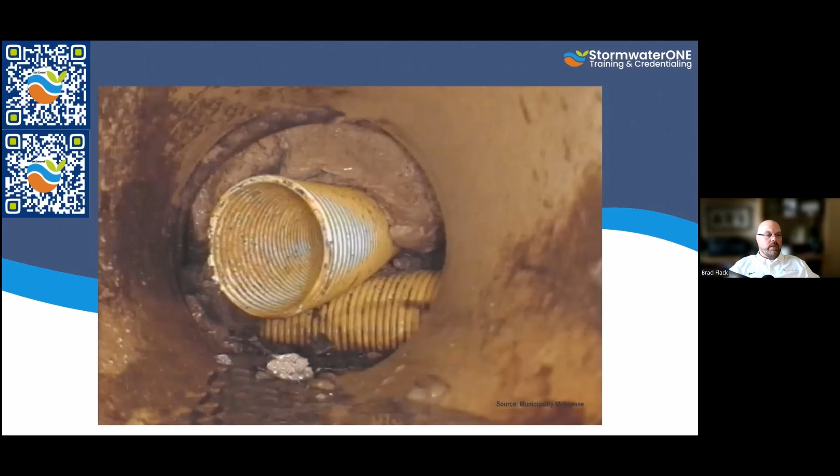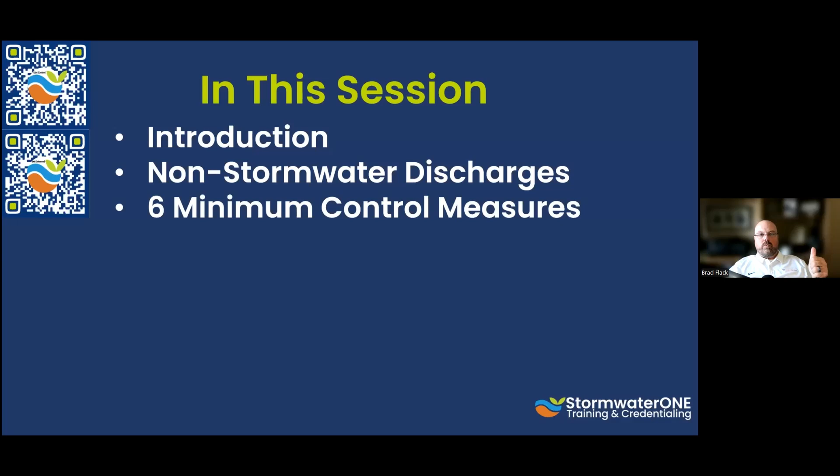So in this session review, real quick, introduction, we talked about that. We went into the non-stormwater discharges. We mentioned the 6 minimum control measures. I talked with you a little bit about your mapping and planning, and why that's important. We went through a list of generating sites. I gave you some information about the monitoring and inspections, doing your quantitative and your qualitative analysis, etc.